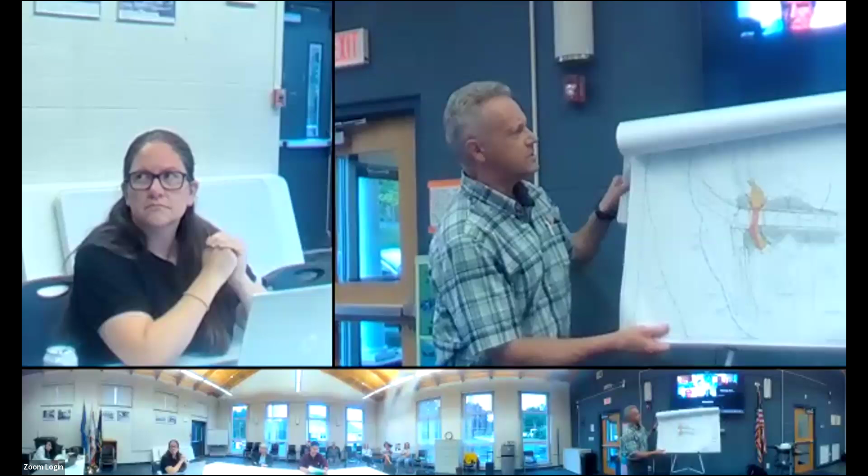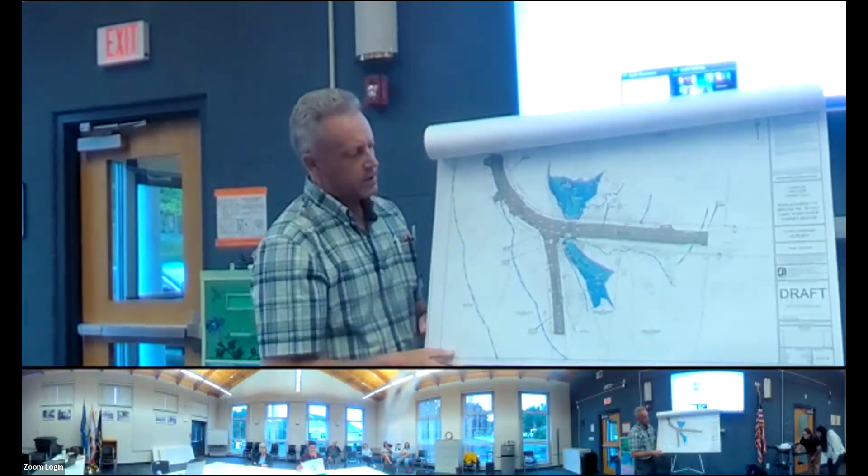So the location of the project is at the south end of Andover Lake. On this drawing, Lake Road is running east-west, left to right on the drawing sheet, and the Cheney Brook runs south to north. The project is located immediately adjacent to the intersection of Basola Road and Lake Road. The existing culvert consists of a steel bolted corrugated metal pipe arch with cast in place concrete upstream wing walls and parapet wall, and downstream concrete masonry unit wing walls and parapet wall.

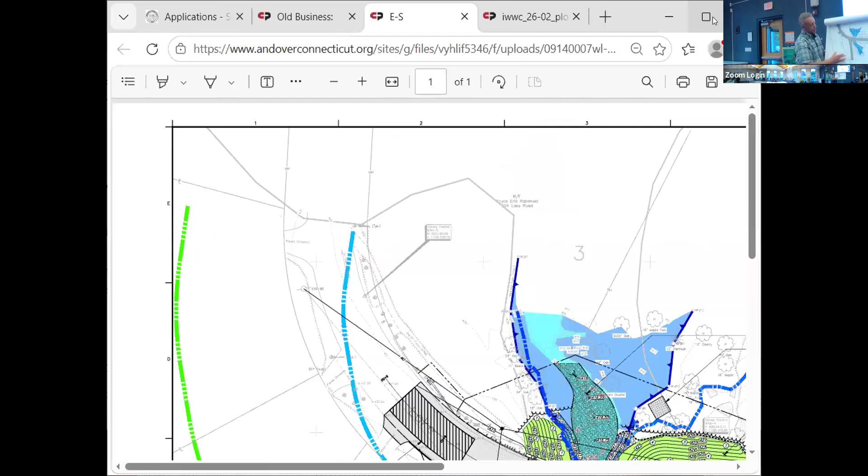Roadside barriers don't comply with current design standards, safety standards. There's also what we call a perched outlet. I'll show you some photographs of that in a moment, that prohibits the passage of aquatic organisms through the culvert. So these are just some photos that I brought along. Here's an image of that perched outlet. You get a sense of the step there for fish to pass through.

These photos right here sort of join. This is an elevation view of the outlet of the culvert. And I'm not sure from your perspective, but there's considerable 100% section loss of many of the flanges and webs of the concrete masonry units on the downstream side.

So it's proposed to replace the existing culvert with a precast reinforced concrete three-sided frame set on cast in place reinforced concrete footings pinned to rock with cast in place reinforced concrete wing walls and bridge rail curb and moment slabs. From your perspective, always the important thing people want to know is the road getting wider? No, it's the same 30-foot road width curb to curb. We're maintaining that. Is the road elevation increasing? No, it's the same elevation. So the bridge will be in the same location, same elevation. Really, the only thing that's happening here is the waterway area is getting larger.

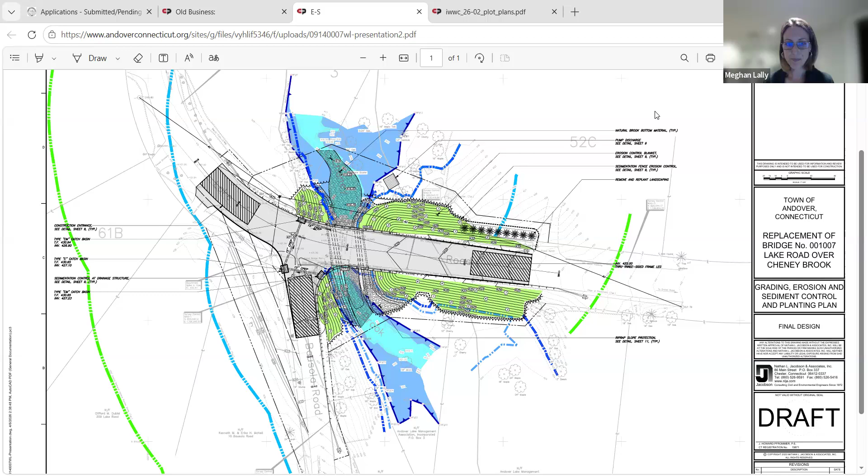And just make sure she gets your name in. Oh, yeah. Okay. Thank you. You guys staying for the regular meeting as well? Wow. Thanks. Thank you. Appreciate you guys coming out.

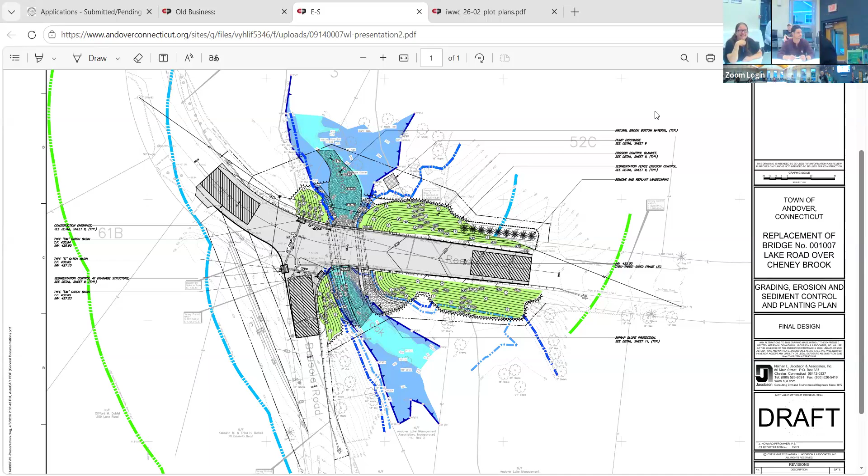And then, I don't know who will contact me about the trees. So it's possible the commission can make final decisions tonight, or they might choose to continue and decide later, so I can't tell you that. Wetlands, that's the comment portion of the hearing as well. All right, well, I'll just wait for somebody to get a hold of me then. Okay. Thank you. Thanks. Good night.

Okay. So I will call to order the regular inland wetlands meeting at 7:34 on July 7th, 2026. So roll call. Martin Fife. Jim Massey? Meghan Lally. Okay. I don't think there's any additional changes to the agenda, right? I was just gonna motion that we move item number 8 to become item number 4, basically to be the next order of business. Sure. Do we need a motion for that? I did motion. Oh, okay, I will second the motion. All those in favor? Aye. Alright.

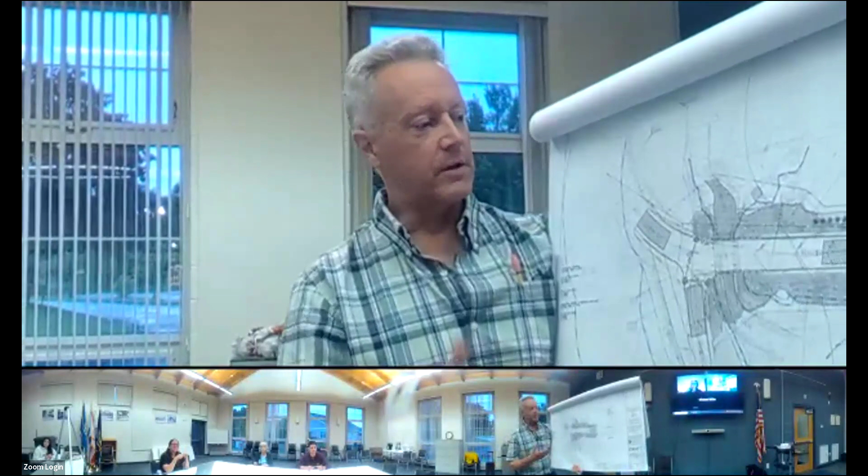Sometimes, as a designer of record, our responsibility is to show something that will work for dewatering. I'll be the first to tell you that sometimes contractors submit their own plan. Some commissions I find make a condition of approval that they want to see the contractor's submitted dewatering handling plan, which I think is a great idea. Because I'm sitting here saying to you, this is what we're proposing, but you don't know what they're doing. It's a means and methods thing. So he might propose something different. I think at very minimum, you could add a condition that it must be in the upland area. Sure. Just to ensure that it's still out of the resource area.

Is it proposed like hay bales or straw bales, like one of those squares? I believe we're using, sort of, dirt bags, like a large tea bag. Well, let's just look at the detail here, see what we have. Just in the upland. Yeah, so that's the detail of the bag with the hay bales around it, and it's set on a crushed stone bed. Okay, thank you.

And then did we want to make a proposal of specific plants now, or did we want to come up with a list and just say we want to see that? Yeah, I guess so. We saw the plant list on sheet 7, which looks like mostly upland trees for the proposed slopes that are being put in. But I presume there's going to be some wetland areas restored too. Is that correct? Let me go to our impact plan. So.

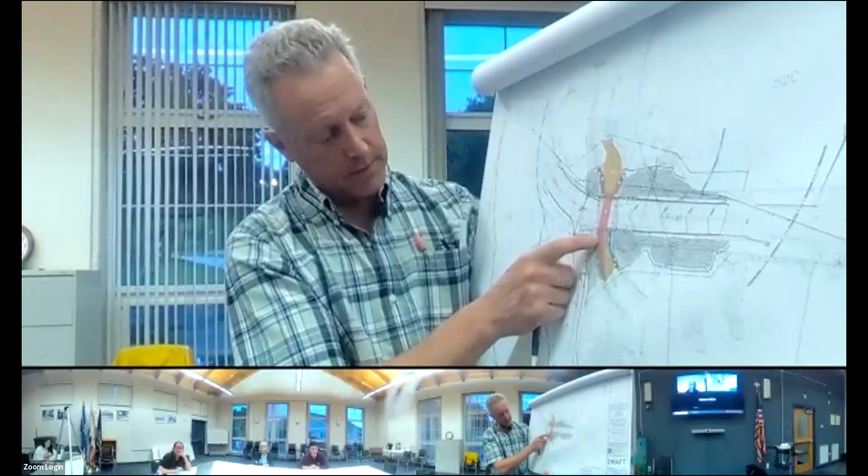Really, the majority of what's happening is, it's probably hard for you to see, all of this proposed, sort of burying the existing underneath here, but that's the existing barrel. Here's the proposed; the existing watercourse is all the way over here where the red is, and that's becoming a slope. There is some existing wetland here, which is becoming riprap. It's not in the channel, it's on the slopes. This is actually all riprap. So that's the 250 square feet.

Well, that's one of them. There's four little areas like that. One here, a sliver over here, and a sliver over here, where there's a little bit of wetland outside of the channel, but it's becoming riprap. So to answer your question, are we restoring any wetland areas? It seems like no, because any place where we're disturbing the wetland, it's being disturbed because it's becoming something else. But we should get credit for the fact that this 14-foot barrel is becoming 28 feet wide, so we should get some credit for the fact that we're creating a watercourse. Just my own personal opinion.

No, I understand. Well, and we talked previously about the in-stream habitat improvement by removing the perched culvert. I'm sorry, I didn't hear the first part of that. Oh, that we had talked about, I think the last time we met, the in-stream habitat improvements that replacing the perched culvert would create. I think someone earlier during the public hearing had talked about the suckers not being able to go upstream right now and things like that. Yes, we talked about that. Is there a question? No question. Just pointing out that, despite there being losses, there's maybe not area, but value gains in the project design. Yeah, the positives outweigh anything that might be impacted.